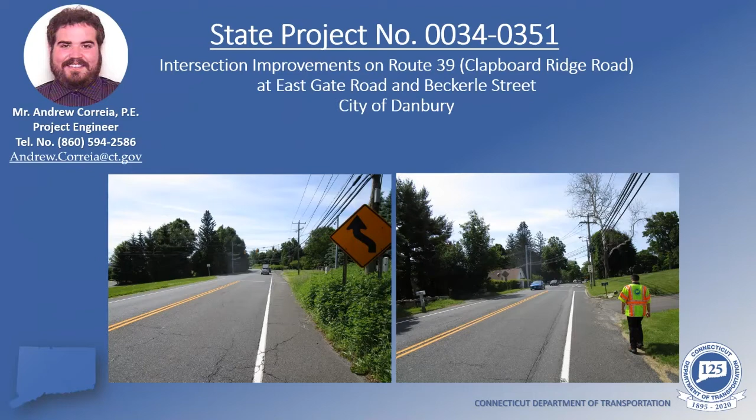Then it'll be followed by Richard Franklin, who will go over the proposed design that we have. Then Jason Boice will go over the rights-of-way process. And then I'll go back to Richard Franklin to finish out the presentation to go over the project schedule and estimated costs.

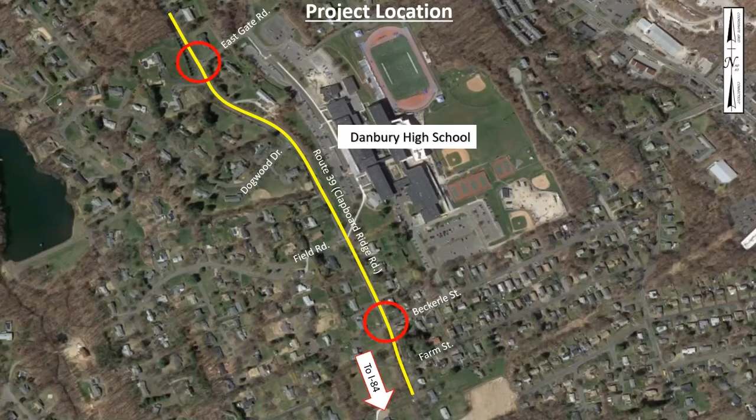The project itself is highlighted by the yellow line running down Route 39, with both of the intersections we're proposing improvements for highlighted in red circles: East Gate Road to the north and Beckerle Street to the south.

The total project length is about 3,700 feet, with the project starting a little north of East Gate Road and continuing further south beyond Beckerle Street and even further south beyond Farm Street. Route 39 is classified as a minor urban arterial, meaning the road can accommodate local bus routes, lower speeds and shorter trips for vehicles, lower vehicle volume, and provide access to residential areas that larger roadways in the area cannot. The posted speed limit for Route 39 is 35 miles an hour.

The project itself is located adjacent to Danbury High School, with both East Gate Road and Beckerle Street providing main access points to the northern and southern parking lots for the high school.

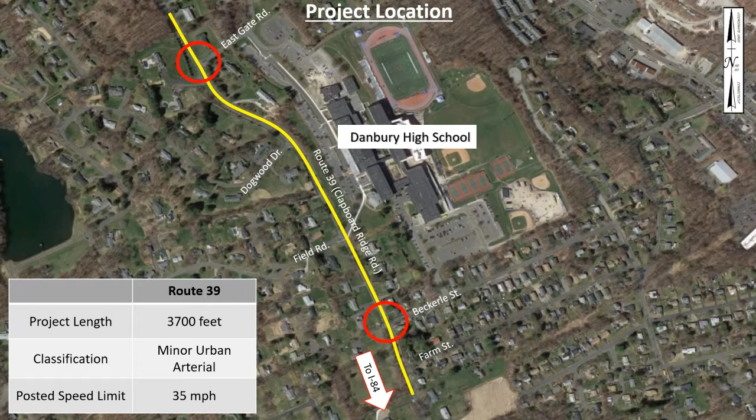Next, in these next few slides, I'll be showing a few pictures of existing conditions and going over what they can tell us about the intersections themselves.

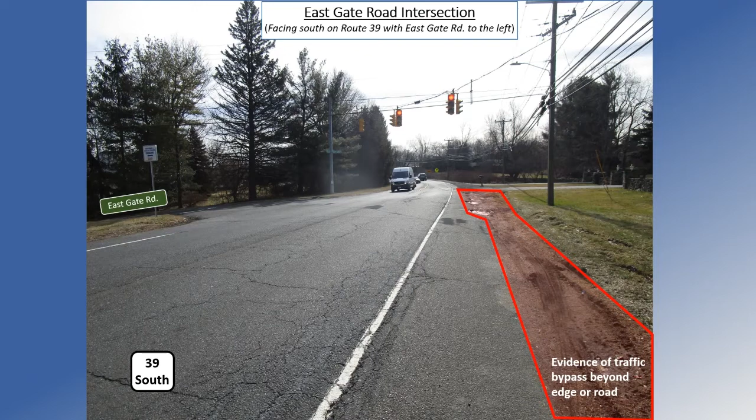To start, we're at the northern intersection, East Gate Road. This photo is taken on Route 39 facing southbound with East Gate Road to the adjacent left. You can see on the right, off the edge of road, evidence of traffic bypass beyond the edge of road, usually due to people waiting to make left-hand turns at the intersection and people bypassing to go through the intersection itself — meaning they'll run off the road, off the shoulder, to continue on further southbound.

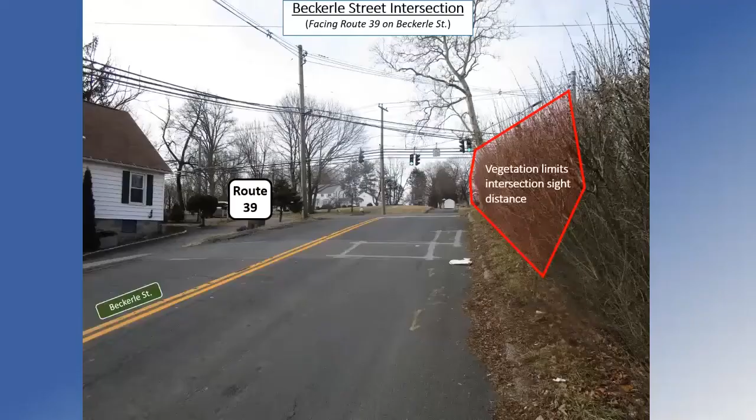Continuing on for this intersection, we are now on Beckerle Street, looking up towards Route 39. As with the other intersection, we have vegetation that limits the driver's ability to look up and down Route 39, as well as adjacent residential properties that make this roadway narrow. As with the other intersection, there is a no turn on red sign for this due to the narrowness of Route 39 and the limits placed on the driver to safely look before turning.

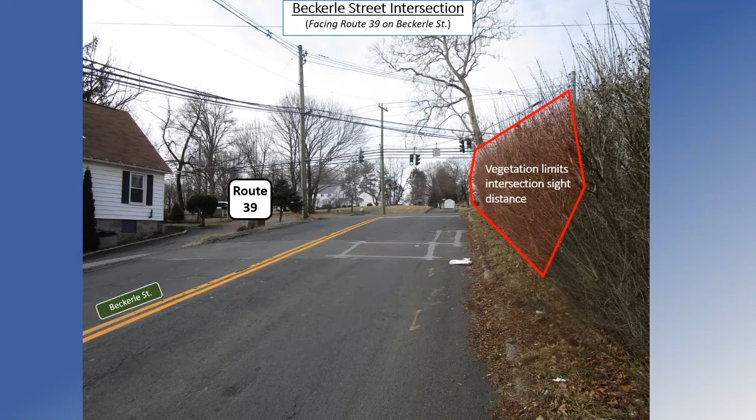Moving on from the existing conditions on the intersections, I'm going to be explaining the project purpose and need, and also discussing the original project initiation.

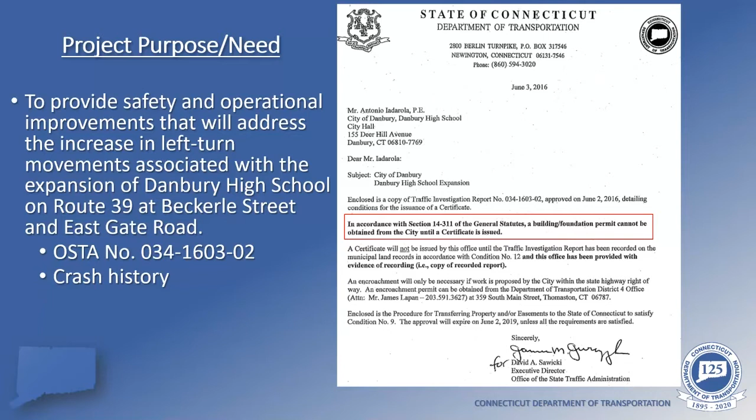On the right-hand side is a memo dated June 3rd, 2016. This is from the Office of State Traffic Administration about their completion of a traffic investigation report. This traffic investigation report analyzed the improvements and modifications that were being done on the Danbury High School and what effects they would have on traffic along Route 39. The reason this traffic investigation report was completed is due to a state statute, as you can see highlighted in red, that the city would need a certificate to be certified from the Office of State Traffic Administration.

Now, with their findings in this investigation report, there were findings of increase in demand and volumes at both of these intersections. So there were 14 conditions that the report laid out that the city needed to complete in order to receive their certificate to continue with the expansion of the Danbury High School. 11 of these conditions the city have met, and 3 of them the state took responsibility of.

Those are highlighted in red now, and they are that a left turn treatment be provided on the southbound Route 39 at East Gate Road, and that a left turn treatment be provided on southbound Route 39 at Beckerle Street, and that the pedestrian amenities at the crosswalk in the vicinity of Route 39 at Field Road be brought up to current ADA standards. So this was originally why the project was initiated.

Now, from there, when it came to our office in the Connecticut Department of Transportation, we looked into it a little more. Beyond this, we looked at crash history, we looked at existing conditions, as you saw in the pictures before. So we finally came upon this project purpose, which is not only to fulfill the conditions in this traffic investigation report, but was also to provide safety and operational improvements that will address the increase in left turn movements associated with the expansion of Danbury High School on Route 39 at Beckerle Street and East Gate Road.

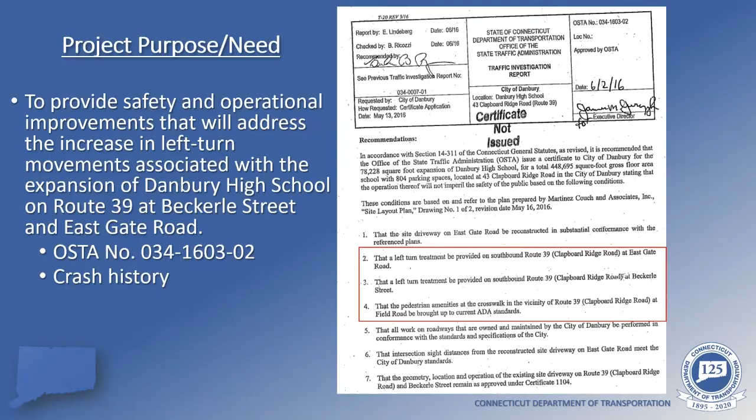As mentioned in the previous slide, we analyze crash histories while investigating project purpose and need. To do this, we create crash diagrams over time frames by utilizing police reports for a given area.

What you see in front of you is the crash diagram for Route 39 and East Gate Road for the time frame of January 2015 to December 2019. North is the top of the slide, south is the bottom, with west and east being left and right respectively. On the left side, you'll see injuries by severity, broken down by time frame, with fatal being a fatality, A being a major injury, B being a minor injury, and C being cuts and bruises. On the right side, you can see a breakdown of the total number of crashes based on type of crash, and the breakdown of total injuries based on type of crash.

For this intersection, there was a total of 21 crashes and 7 injuries over the time frame. While analyzing these crash diagrams, we look for patterns given to the intersection and to the roadway to see what we need to do to improve.

For this intersection, two areas of patterns showed themselves, now highlighted by the yellow circles. The larger yellow circle is southbound travel coming into the intersection. Rear ends and multiple rear ends seen here are most likely due to a timing issue with the left turns and bypassing traffic coming through. On the northbound direction in the smaller circle, these rear ends and multiple rear ends kind of skewed themselves and were a little too much for what was given of the volumes coming in and out of the intersection.

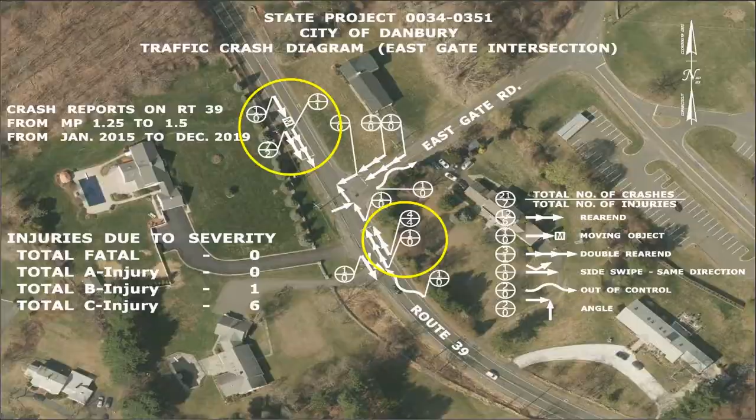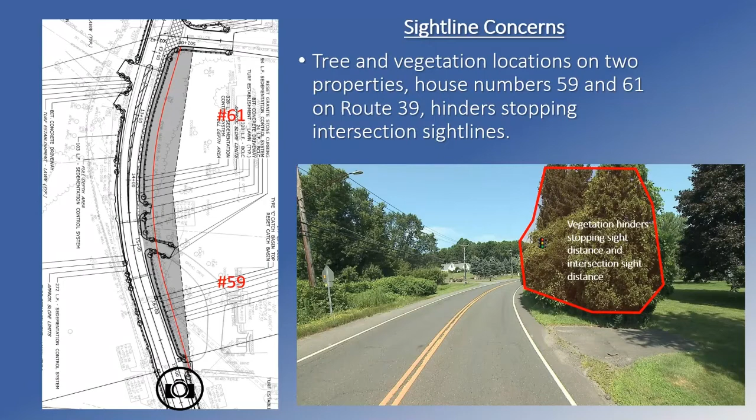Looking at the left-hand picture, the camera is where this photo was taken from. The driver should be able to see the signal, but they're not able to due to the vegetation.

To show what I mean by a driver's perspective coming into the intersection being hindered by the trees and vegetation, there's a short video clip in this slide. This is a car driving at the posted speed limit coming up to the intersection.

As the driver is coming up to the intersection, the driver's perspective does not expect a traffic signal to come out so quick from the inside of the curb. I'll show the video again to exemplify this.

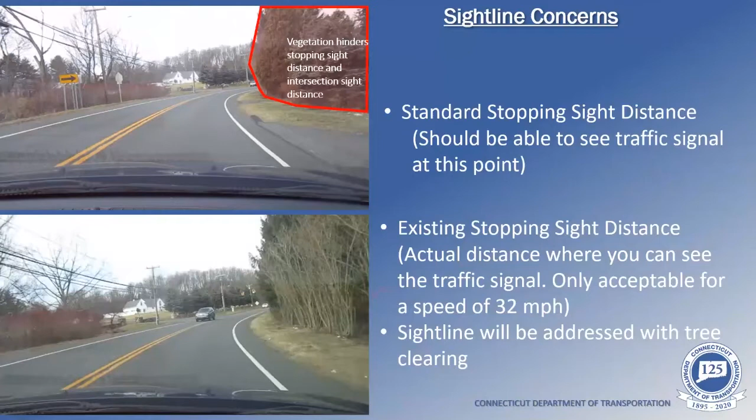Breaking down the video further into the points of where stopping sight distance is needed, the top picture shows the position of a car where the standard stopping sight distance should be. As a driver, you cannot see the traffic signal head due to the vegetation highlighted in red. The bottom picture shows the actual point when a driver can see the signal head, which is only good for a speed of 32 miles an hour.

We will be addressing this with proposed tree clearing to alleviate the issue.

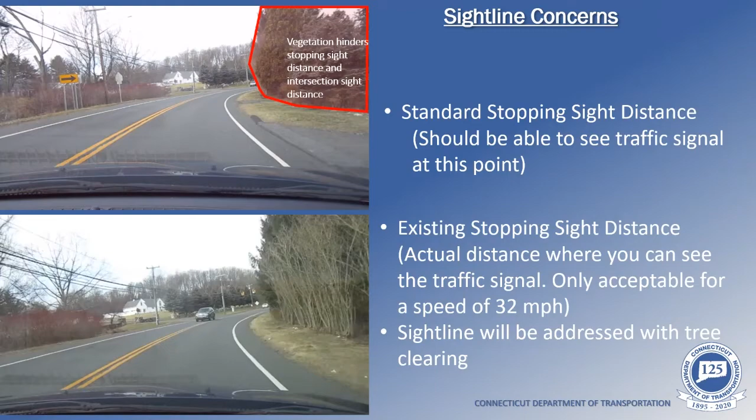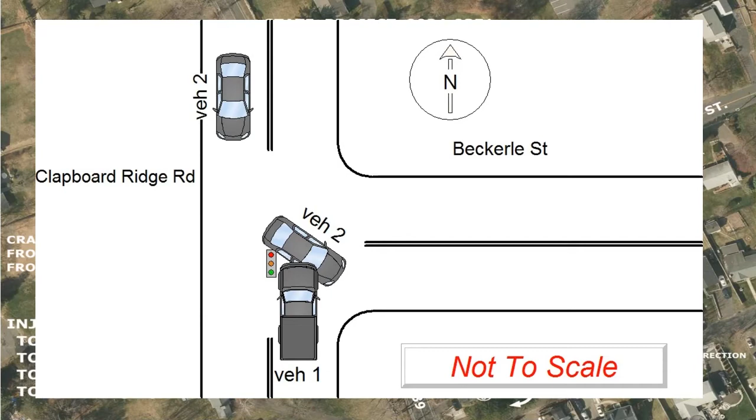Now, we propose some safety improvements for both of these intersections, and I'll be handing off the presentation to Richard Franklin, who will go over what we plan to accomplish.

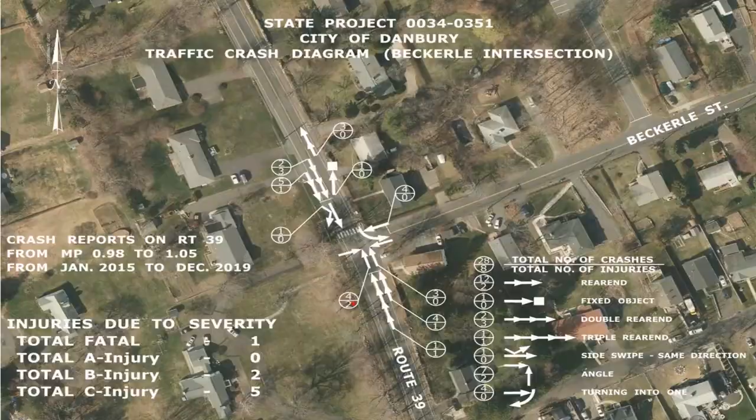I'd like to reiterate that our design is at the 30% design phase, meaning we are 30% of the way towards final design. Due to this, the project design is subject to change between now and final design.

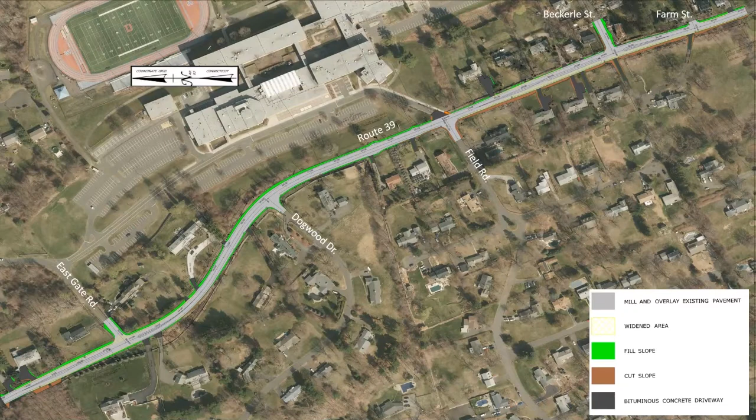Here's an overview of our proposed plan for the project. We will be taking a close look at each section of the project a little bit later in the presentation. This is what we like to call a color plan. Each color indicates a different element within the project design. The light gray is the roadway, the yellow hatch is proposed widening, the light green are fill slopes, the brown are cut slopes, and the dark gray are driveways.

On this slide, we can see everything we're looking to accomplish within the scope of this project. We're going to be proposing new traffic signals at East Gate Road and Beckerle Street, 11-foot dedicated turn lanes at East Gate Road and Beckerle Street, 11-foot travel lanes throughout the project corridor, resurfacing all of Route 39 within the project limits, tree clearing to improve sightlines, upgrading all crosswalks and sidewalk ramps to ADA standards, but we are not proposing sidewalks due to limited state-owned right-of-way, as well as the lack of existing sidewalks along Route 39. We're also proposing new catch basin tops and catch basin offsets where necessary.

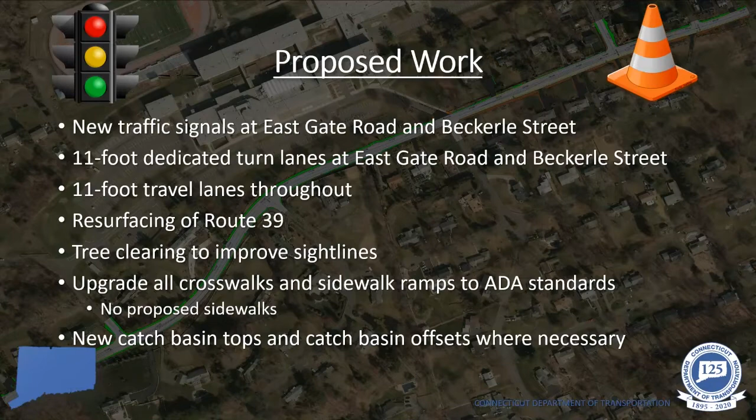Here we have our color plan once again. This time we're focused into the East Gate Road intersection portion of the project, and this is the intersection north of Danbury High School. The main change we're proposing to this intersection would be the introduction of a dedicated left turn lane. We're also proposing new traffic signals to bring this intersection up to date and to accommodate our new intersection layout.

Along with the traffic signal, new pedestrian amenities are being proposed that meet Americans with Disabilities Act standards, which I will be referring to as ADA for short. Notice the yellow shaded region. This is where we are proposing widening and full-depth roadway reconstruction to fit the new turn lane. There will be about 4 to 5 feet of widening on the northbound side and about a foot of widening on the southbound side. There's less widening being proposed on the southbound side to avoid impacting a large stone wall. There will also be some driveway reconstruction in the area in order to bring these driveways up to state standards.

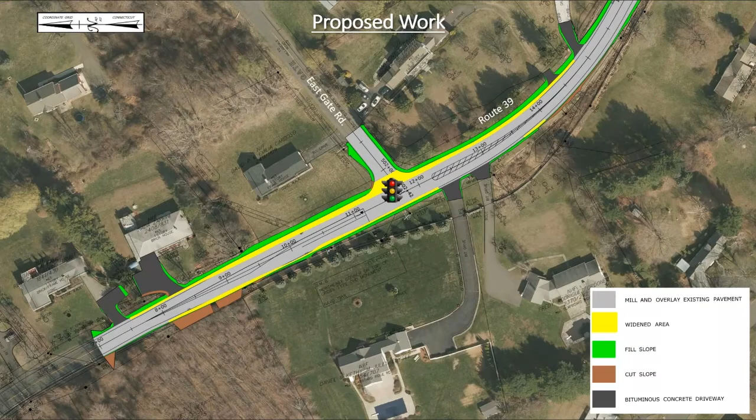Here's a rendering of what the intersection might look like when construction is completed. Notice the 11-foot turn lane and travel lane with a 2-foot shoulder. This is the narrowest shoulder within the project to avoid impacting that wall to the right, which I mentioned previously. The standard shoulder width within the project is at least 4 feet.

It is important to add that these left turn lanes improve the safety of the intersection by giving users a protected left turn phase. This intention is to avoid possible crash scenarios like the one Andrew Correa previously presented about that resulted in a fatal injury. Andrew also showed there was evidence of drivers traveling off the right side of the roadway to pass vehicles waiting to turn left. Having a dedicated turn lane and travel lane will mitigate that issue as well.

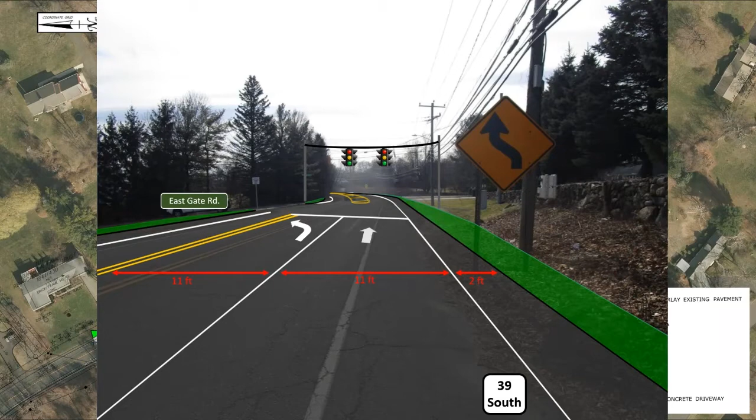Now we'll take a closer look at the Beckerle Street intersection portion of this project. It is very similar in design to the East Gate Road intersection and introduces a new dedicated left turn lane. Again, we're proposing new traffic signals and pedestrian amenities.

At this intersection, the majority of the widening is being proposed on the southbound side. This is due to limited state-owned property on the northbound side, and there are several stone walls adjacent to the roadway, which we want to avoid impacting. The widening on the southbound side ranges from about 5 to 7 feet.

At this intersection, you can see there is a significant brown shaded region on the southbound side, which is a cut slope. This is when we'll be cutting into the slope to provide smooth grading on the properties being affected by the roadway widening. Note that the cut slopes are indicated in brown, but all properties that are affected by this project will be receiving new grass. The properties adjacent to the roadway here are steep, so we will have to do a little bit more work to provide that smooth grading I mentioned.

There will also be more driveway work in this area than at the East Gate Road intersection due to the steepness of the driveways. This is because we want to provide driveways that do not exceed the maximum grade recommended by the state.

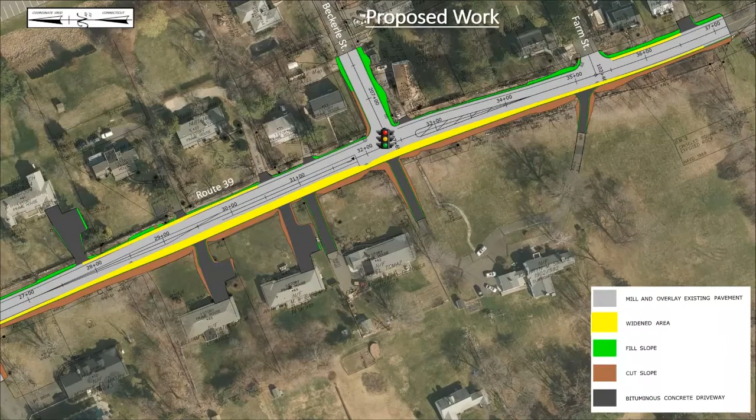Here's a rendering of what the intersection might look like once completed. Again, notice 11-foot turn lanes and travel lanes with the standard 4-foot shoulder here. You can see the brown cut slope again, but reminder, the grass will be provided on every property that is affected.

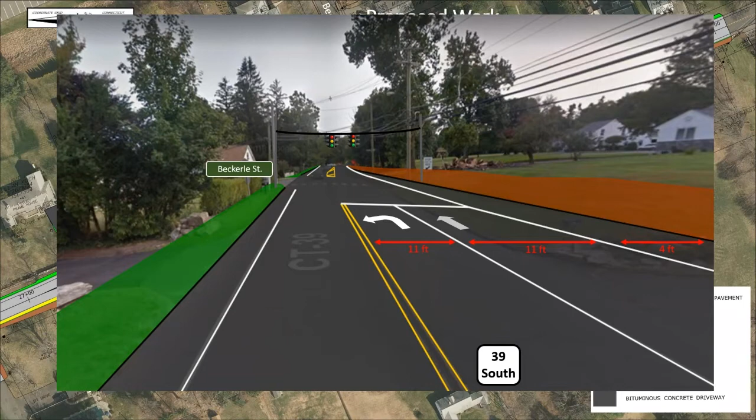As mentioned previously in this presentation, one of the requirements from the OSTA agreement with the City of Danbury was to upgrade the pedestrian amenities along Route 39 at Field Road to meet ADA standards. In these pictures, you can see the existing sidewalk ramp and crosswalk at the front of Danbury High School across from Field Road. Our proposed design replaces this ramp with an ADA compliant ramp like the one on the drawing in the lower right side of your screen. A new crosswalk will be put into place as well.

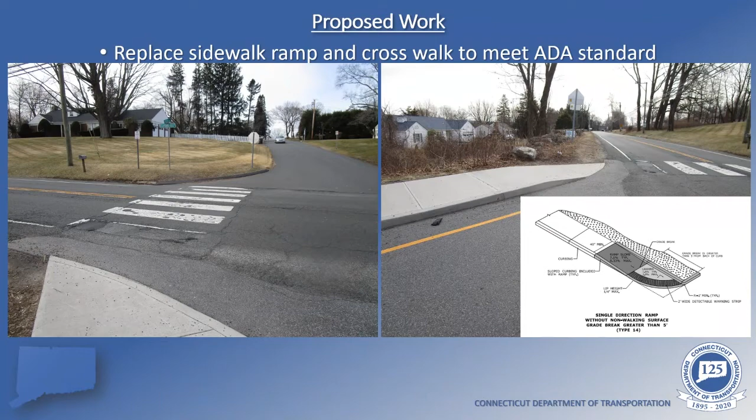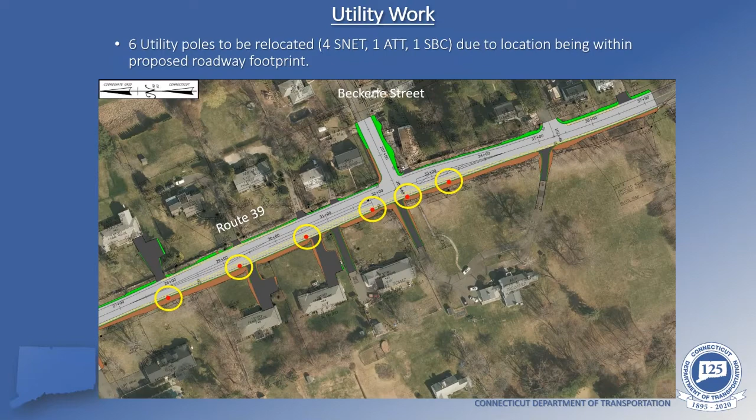And at this point, I would like to hand the presentation off to our rights-of-way coordinator, Jason Boice, so he can explain a little bit about the rights-of-way process.

Thanks, Rich. As Rich mentioned, my name is Jason Boice. I'm a project coordinator for the department's Division of Rights of Way. Rights of Way's purpose is to acquire all the property rights necessary for the project. All property rights will be acquired in accordance with Connecticut General Statutes sections 13a-73 and 13a-98e and the Uniform Relocation Assistance and Real Properties Acquisition Act of 1970 as amended.

Anticipated property impacts on this project consist of sightline easements and slope easements. Now, of course, those are subject to change as the design progresses.

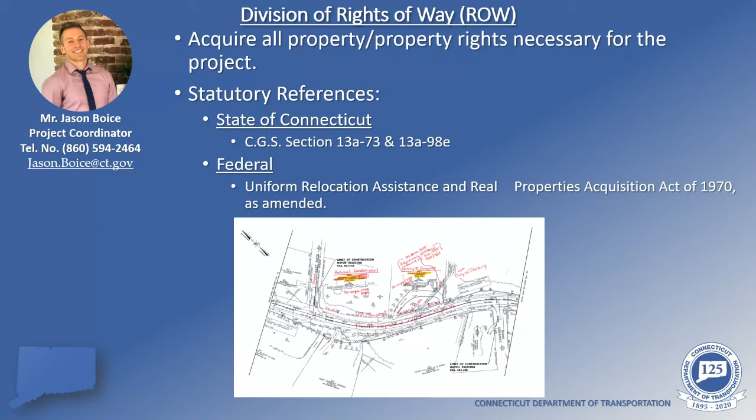So, the right-of-way acquisition process. First, each property owner will receive a letter of intent to acquire. This kicks off the right-of-way process and is often the property owner's first involvement with the right-of-way office. From there, valuation will occur. The department determines the fair market value of the impacts to the property to establish an offer of just compensation. Once valuation is complete, an offer letter will be drafted. The owner will receive a written offer letter from the department based on that valuation.

And that's when negotiations will occur. The owner is given a reasonable amount of time to consider the state's offer and enter into negotiations. At the completion of negotiations, an acquisition will occur. An acquisition can occur in one of two ways. One, an agreement can be reached and then an abbreviated real estate closing will occur. The state prepares all the documentation and pays all the recording costs associated with the closing. If negotiations reach an impasse, the Commissioner of Transportation has the authority to acquire property rights through eminent domain.

Now, eminent domain does not preclude the owner from continued negotiations with the state. Owners are still entitled to the state's offer, the funds are deposited into the court, and the owner can petition for withdrawal at any time. Once funds are deposited into the court, they are out of control of the DOT, and depending on the encumbrances associated with the property, the withdrawal process can take some time. Now, the owner has 6 months from the date of condemnation to file an appeal with the court if continued negotiations cannot reach an agreement.

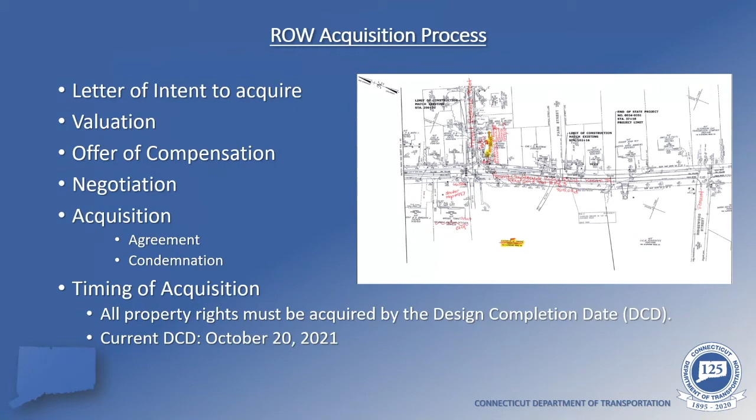Now, I'll turn it back over to Rich to go over project costs and schedule. Thanks, Jason. To finish off our formal presentation, I'm going to cover project cost and schedule. We are looking at a total construction cost of about $4.1 million, with 80% being covered by federal funds and 20% being covered by state funds. And we are looking to begin construction in the spring of 2022.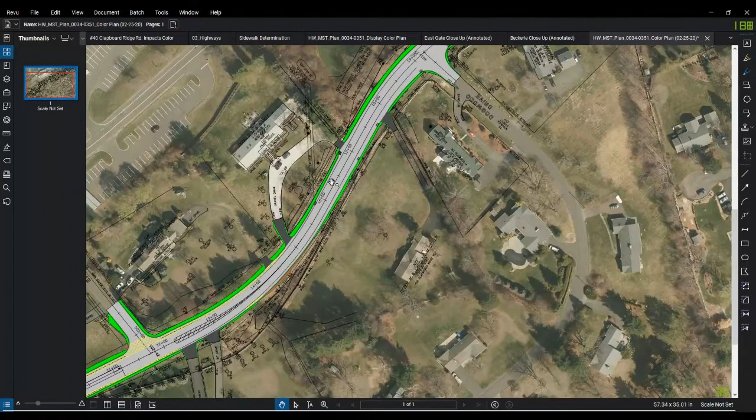Yeah, sure, Mike, I can speak on that. Let me share my screen. Okay, if everyone can see this, could you let me know what they were looking for again? It says, other than the 1 foot, any anticipated work on the south or west side of Route 39 between Eastgate and Dogwood Drive? Sure, let me zoom into that area and show what's going on there.

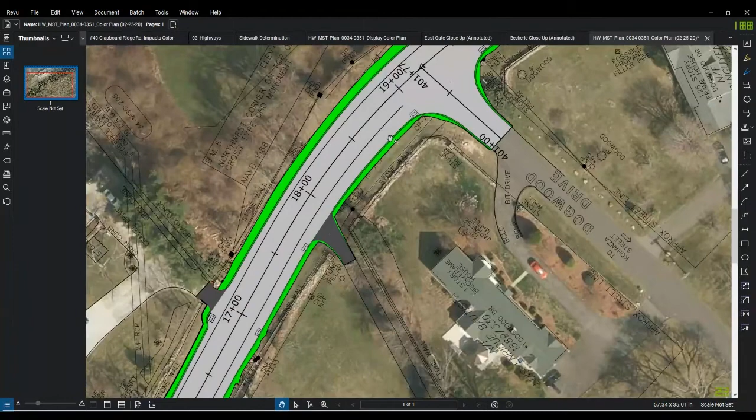Here at the top of the screen we have Dogwood Drive, and in the bottom left we have Eastgate Road. As you can see by this yellow hashed area on the northbound and southbound sides, we have a little bit of widening until these parts, but then once we transition back into 2 lanes along Route 39, we're looking to match existing conditions as much as possible. We'll be mimicking the existing edges of road, and we might just do some slight grading on the southbound side, but beyond that there isn't much being proposed in this area.

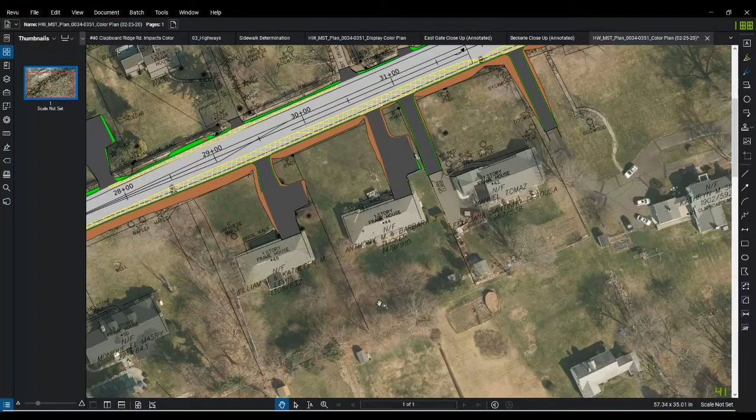Yeah, absolutely. Once a valuation occurs, it's considered a registered value, and that offer is made to the property owner. If they can't reach an agreement and the state does file for eminent domain, that valuation amount is deposited into the court, and the property owner can withdraw it. Additional negotiations can occur, but at a minimum that valuation amount is deposited in the court for the property owner. If an agreement can't be reached, the property owner has six months to file an appeal, and at that point an argument can be made in front of the judge for additional compensation.

We got an email question in. It says, this is Senator Kushner, can we get a copy of the presentation? Yes, Senator, you can get a copy. We will be posting it, like I mentioned earlier, on the state's website. It'll be a YouTube video that everybody can watch, including the comments from tonight's meeting and the question and answer session, the whole shebang. We'll also be providing the city of Danbury a copy of the video so they can post it to their own website as well.

We got a question from the chat: with the current plan, will no work be done on the curve on Route 39 in front of Dogwood Drive? I believe the work that will be done will just be resurfacing. There won't be any widening, there won't be significant grading, just resurfacing of the roadway. Did I get that right, guys?

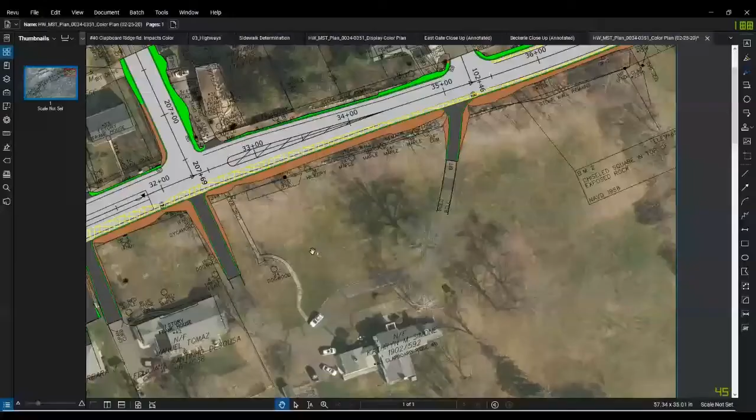A question came in from chat. My house is at the corner of Beckerle and Clapboard Ridge on the southbound side, and I believe there's a second piece of that. My property will be highly impacted. I would like to speak to somebody about my property. So we can pull the property up. I think Rich has done that. Rich, is that right? Yep, this is the property.

Rich, would you go over some of the property impacts and the work we're proposing? Sure. On our color plan, this yellow hatched region is where we're proposing our widening. This whole region currently is not roadway, but we will be expanding it to introduce this new turn lane. Because of this, we'll need to do some regrading in front of the property, indicated in this brown shaded region. All the regrading done, we will replace the grass and everything. The brown just indicates cut slope. The grading is necessary because we have certain standards for how steep roadways or side slopes are allowed to be right off the roadway. Following those standards leads to the extent of the grading here.

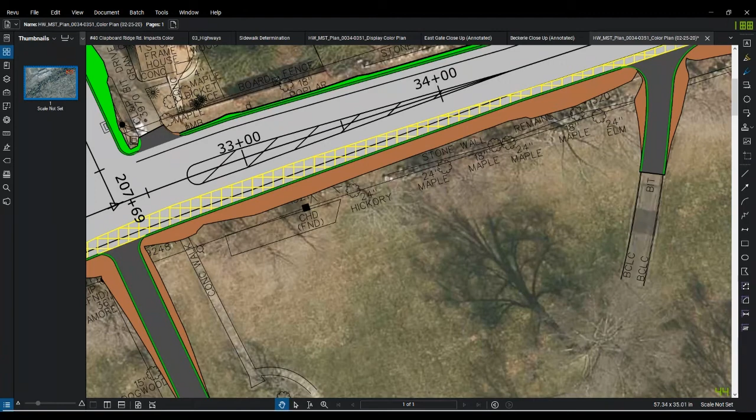We got a comment asking how to repeat access to the YouTube recording of the meeting. The same way you accessed the meeting tonight, through the project webpage—the YouTube link will be posted there after the meeting, as will a link to the demographic survey pertaining to tonight's meeting, how we did for outreach, how we did to meet your needs. Typically we ask questions about whether the building was accessible to you, but obviously we're in a different world right now, a virtual world, doing a virtual meeting, and we'd like feedback on that too. So it's the project webpage—let me pull up my notes so I get it right. I can spell it out: http://portal.ct.gov/DOT Danbury 34 or hyphen 351. That's portal.ct.gov/DOT Danbury 34 351. So the same way you got to the meeting tonight, you should be able to get to the YouTube recording.

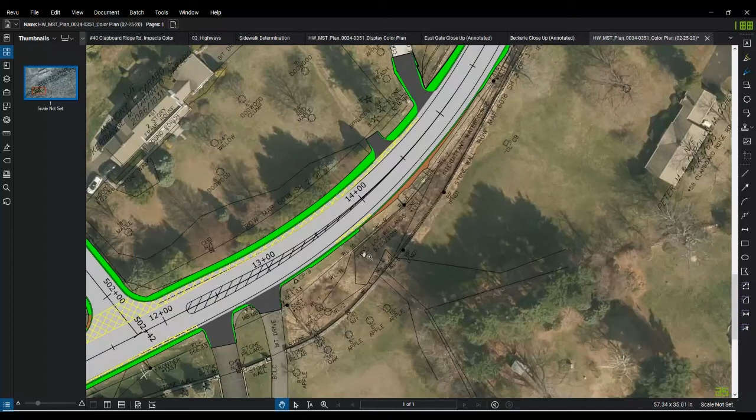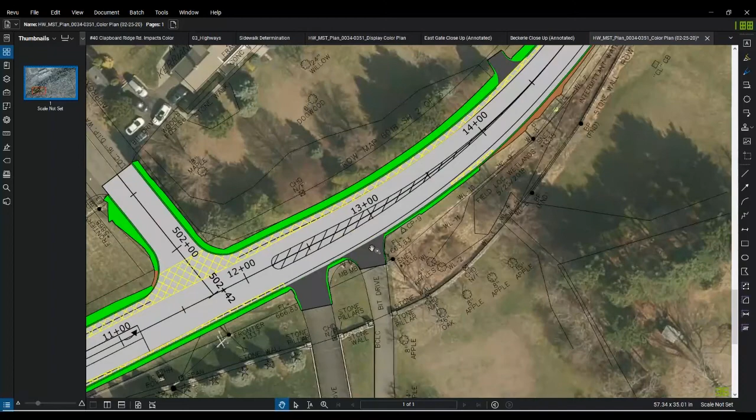Sure. Rich, you want to try to zoom in as close as you can and just kind of show that yellow hatch that's kind of tough to see in the area that's in question? Yeah, sure. First I'll just zoom out for a second so you can see. Here's Eastgate Road, over to the left of my screen. And when we said 1 foot widening, it's about 1 foot, not exactly 1 foot all the way through. But if we have the intersection here, we have this little sliver of widening coming through the intersection.

And then after the intersection, we're going to begin transitioning back down to 2 lanes. And we'll need another little sliver of widening here to make that happen. And then this is where the widening ends as far as the Eastgate Road portion of the project is concerned. After this point here, there's no more widening until we get to the Beckerle Street intersection. Thanks, Rich. I hope that answered the question.